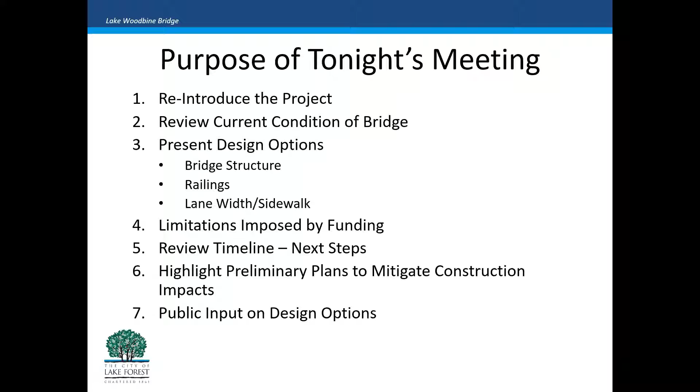Right now we have a budget of about 2.5 to 2.9 million, so that will cause some limitations as well. Review the timeline, and then highlight the preliminary plans to mitigate construction. We obviously know with a ravine and the homes and the traffic that is on Lake Road from the beach, we need to be very careful on how we go ahead and progress through the construction. That's going to be a big part of this, so we're going to take our time putting that plan together. Then obviously public input on the various design options.

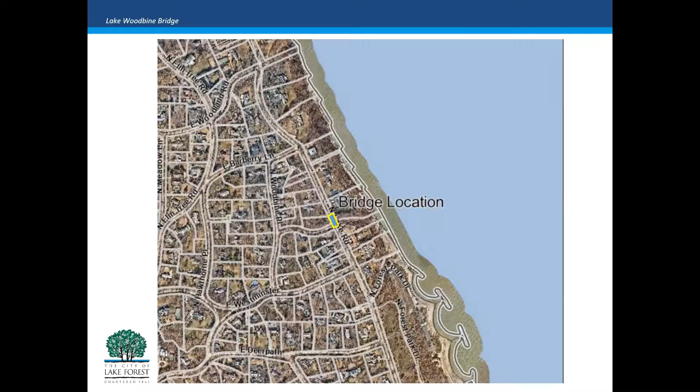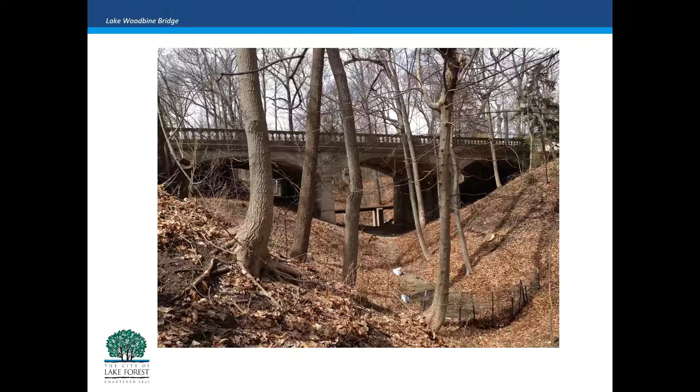Obviously, I think everyone knows exactly where the bridge is at, just north of Woodbine, south of Barberry. Next slide — nice picture of the bridge to give context, as all of the stormwater essentially east of Lake Road runs through our ravine system down to the lake. This is one of those systems as well.

So the preliminary discussion to date — as I referenced, back in 2014, 2015 the HPC, the City's Historic Preservation Commission, had actually done a preliminary review on the bridge, and they directed staff to do a further analysis to go back and discuss further whether repair could occur or whether replacement. After some additional data and a deeper dive and a deeper study on the bridge, it was determined that the bridge had to be replaced. We're going to go into a little more depth on that to explain it further.

The HPC also directed communication and coordination with obvious stakeholders — the different historic preservation groups in town, the residents, the neighbors — and then the State Historic Preservation Office directed that the improvements be compatible with the surrounding historic district, and that the plans would ultimately be reviewed by SHPO, the State Historic Preservation Office, as well. So all of those things are going to occur. This process for us is going to take a little bit longer because we're seeking a grant. When we seek a grant, we actually have to do a phase 1 review, a phase 2 design, and submit them.

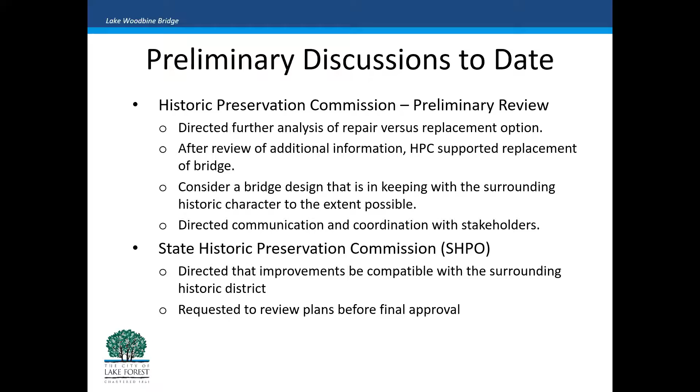It takes a little bit of time to get through this grant process, so the timeline is probably at least 2 years out till we're looking at construction. But Dave, I think you've got a slide on the schedule for that. So Meg, are you going to take us through the historic side? And then Dave will review some of the other items.

Thank you. So I am Meg Kindle and I'm a historic preservation architect, and I think I'm familiar with some of you here in the audience tonight. Just a moment before I begin, sorry. Can I use this mic? We don't want it to interfere with the Zoom, so maybe try talking a little louder to begin with. We can try the microphone, and we have someone here who'll let us know if it's causing issues. Go ahead and just turn it on up top. Oh good, great, hello, is that better? I can hear myself now.

Okay, good. Well, to begin, I'm Meg Kindle, a historic preservation architect, as some of you here today are familiar. And so before we go on and talk with the engineers, just a moment to talk about what we're talking about with this bridge, give some vocabulary to the historic characteristics, and then talk about the challenges.

So first of all, when I think about this bridge, the site and its context in the historic district crossing the ravine, there's this idea that it's a straight flight over the ravine. Certainly the design of the bridge is very traditional with the repetition, with the balusters. It has a very pedestrian-friendly scale to it. It doesn't feel like a highway bridge. It feels like an element of the landscape. It doesn't feel industrial, so that's very important to us and to the design team.

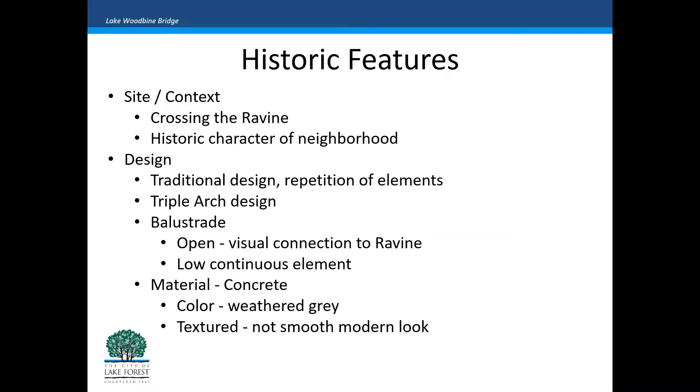Next slide. So going on to design challenges - certainly the SHPO requirements are paramount. We have to work with the State Historic Preservation Agency. We do a lot of work with the agency for transportation projects, so I think that's going to be a good relationship. And I know here in Lake Forest you have a good relationship with SHPO, so I think that's a comfortable ground to be working within.

As far as the design, IDOT has their standards for highway bridges, which this is. This is also a pedestrian bridge, but as a preservation architect - be it a house, a train station, a CTA station, a school - there's a reason codes exist, and that's to keep everybody safe. So we need to make sure that we accommodate and listen to the IDOT requirements for crash barriers, and that's just undeniable. We have to make sure, and this is why Lochner is involved, that we are keeping the traffic where it belongs and not in the ravine. The other idea is that we need to have the width adjusted for modern cars.

And also the sidewalk has to be wide enough to meet modern code for the ADA. So there are codes that exist now that didn't exist when this bridge was designed, and we can't change that. We have to work with it. So those are part of the design constraints of this bridge, as well as historic.

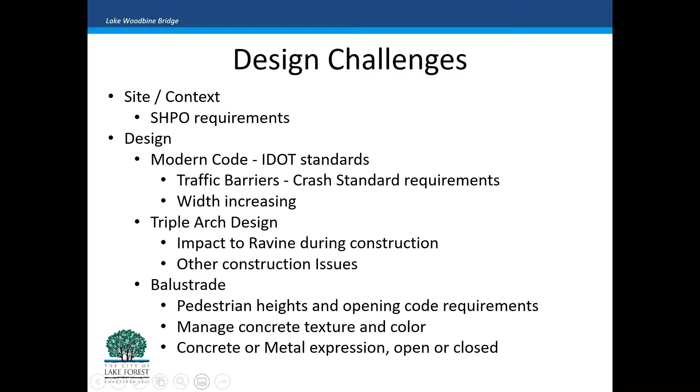I know it's a busy time of year, and the number of evenings we have left is running short. So I'm going to talk a little bit about the existing bridge itself, put things in context. It was constructed in 1912 as a 3-span closed spandrel arch. What that means is the bridge has 3 basic arches, and the sides hold in material that the road is based on. So basically it's a filled bridge. The material inside is sand or gravel or something porous.

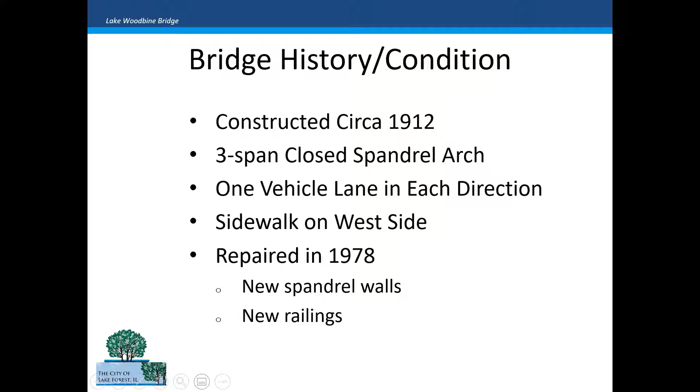There's 1 vehicle lane in each direction, same as on Lake Road. There's a sidewalk on the west side. It was repaired in 1978, at which time they took off both sides, probably replaced the roadway as well, and put new railings on. So almost everything you see, unless you get underneath the bridge, is from 1978. It's not original, and I'll show you some pictures of it.

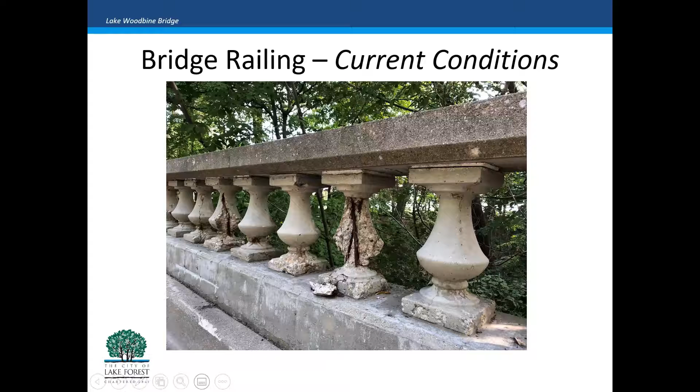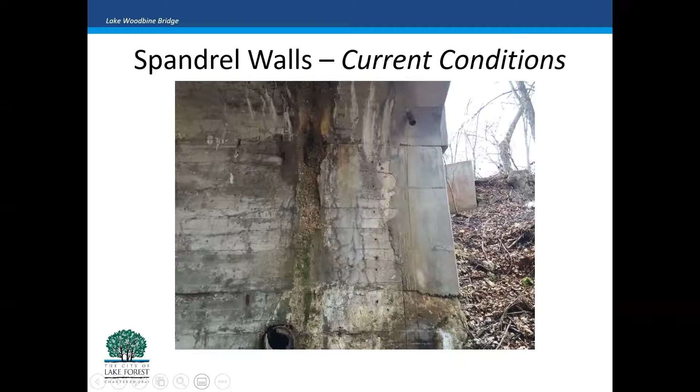But when you get underneath, you start to see some things that raise the eyebrows a little bit higher. This is one of the piers, and you can see on the right-hand side that gray concrete is what was put in 1978, and everything to the left is original. It's showing a lot of map cracking, and if you can see some white lines, that's efflorescence, where water is actually seeping through and pulling the lime out of the concrete. That's a sign of advanced deterioration, and it's not repairable kind of deterioration.

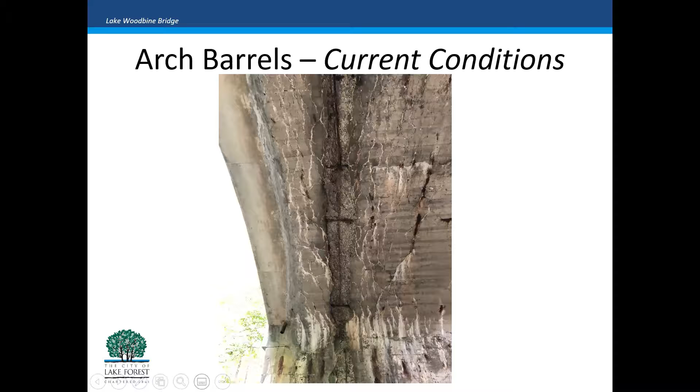All right, next slide. This is looking up at the underside of the bridge, and you can see that exposed rebar that shouldn't be there. That's where concrete has actually fallen off. That line is probably the curb line up above, where water is leaking through at the curb line and coming straight down through the fill material in the bridge. It's gotten through to that steel, which has expanded a little bit and popped off that concrete. And this isn't the only place where that's happening.

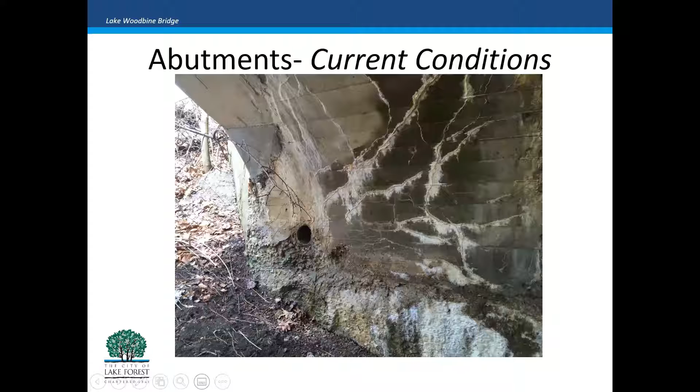And then this is showing one of the abutments, where you can see that water has gotten in behind the abutment and is starting to degrade that concrete as well. So it's for these reasons that we've recommended a replacement of this structure.

As Mike mentioned, we've got 3 decision points that we're really considering.

The width of the bridge is a concern, since it fits nicely in the adjacent community right now, and there isn't much appetite for widening this bridge. We'll do our best to keep it as narrow as we can. The current IDOT guidance is that it needs to match the existing roadway on each side, which is slightly wider, maybe a foot or so. So the roadway itself will need to be slightly adjusted, but that's just to match the approach on each side.

The sidewalk that's out there now is probably 3.5 feet, and if you count the top of the curb you can get another 6 inches, so it might be 4 feet wide. Current ADA criteria is 5 feet, so the sidewalk would have to be widened about a foot. So right now we're talking about widening the bridge by 2 feet if we have to, but again, that's according to IDOT criteria that we have to live by.

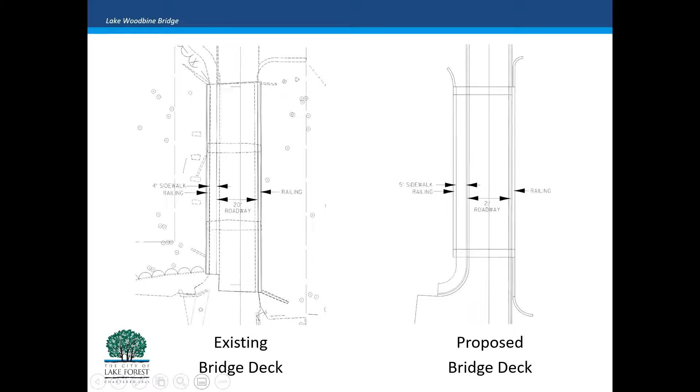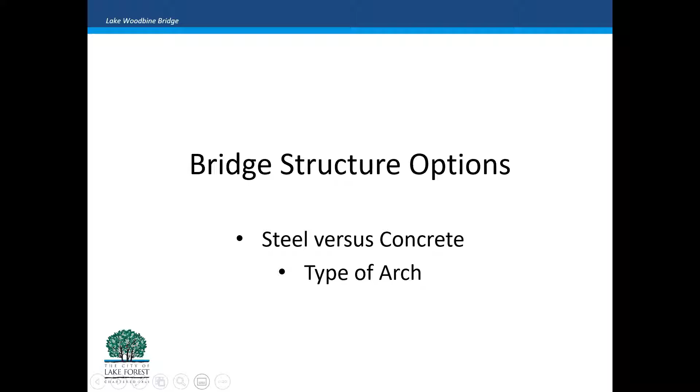Bridge structure options. As Meg mentioned, there are a lot of architectural concerns that go hand in hand with the engineering considerations. So we're looking at steel versus concrete and that type of modern arch.

If you could go to the next slide. The first option that we looked at was actually something very similar to what's there now. This bridge option has quite a few design flaws and strikes against it. It would basically just put back the inherent flaws that occur with a bridge of this type.

There's not much we can do about a filled arch bridge. Moisture is going to get in there and it's not going to have anywhere to go.

The other issue with this bridge is that we cannot put the new bridge back where the old bridge is currently located, because we can't pull the old foundation out, and we can't reuse it because we're not sure what's there. It's 110 years old, and it is not engineeringly feasible to reuse a foundation that old.

So if we did reuse this bridge type, we would have to shift it one direction or the other, or we'd have to start changing the arch lengths so they could sit on the new foundations. That would also require quite a bit of construction down within the ravine itself to get new foundations in.

We're not only concerned from the project perspective with what the bridge is going to look like, we're also concerned with how we're going to build it, and with the health of the ravine.

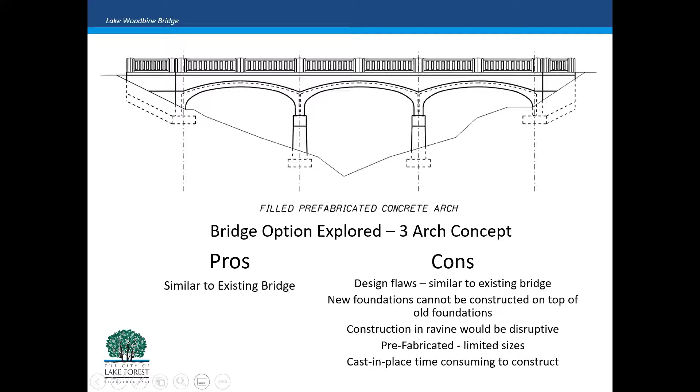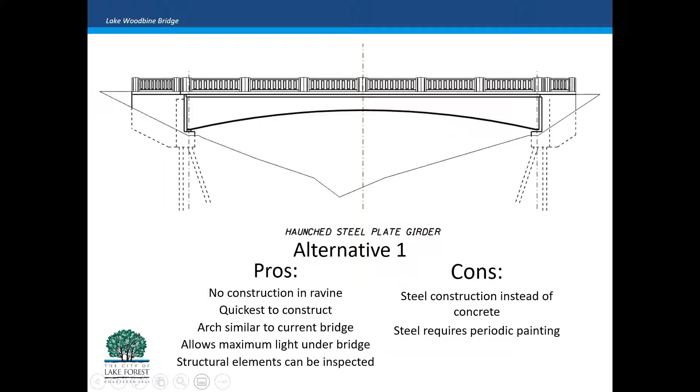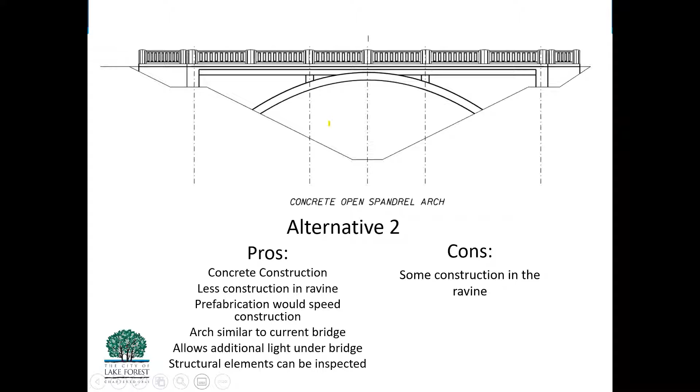So those are the three bridge types that we are considering.

Moving on to the railings. We have very specific requirements because this is a bridge on a public roadway longer than 20 feet, so it comes under IDOT's jurisdiction. The railing itself has to be 3.5 feet tall, with limitations on how wide any openings can be for safety, so kids can't fall off or squeeze through a hole. It must meet crash test standards, with different levels of crashworthiness, which I'll discuss in the following slides. Since the span length puts it under IDOT jurisdiction, they'll have the final say on whether our proposed railing meets their requirements.

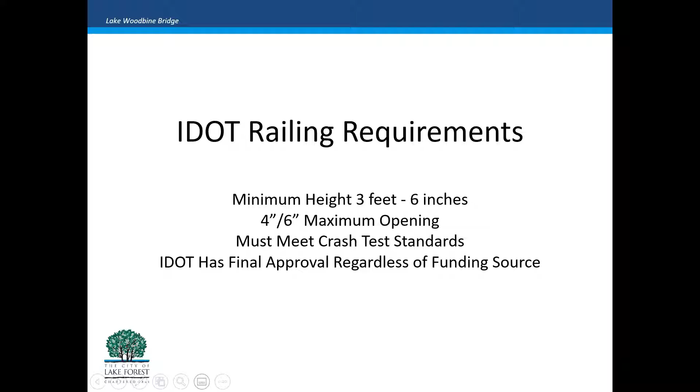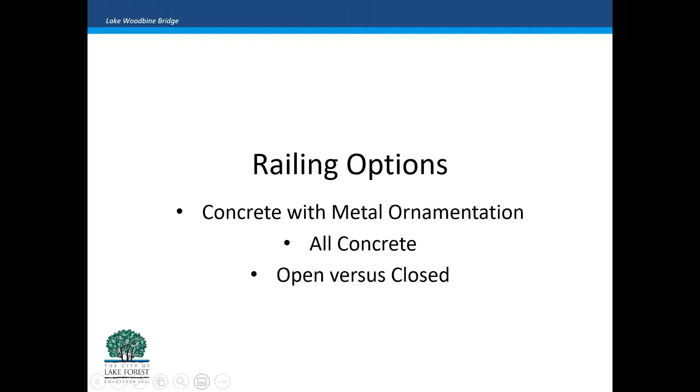As Meg mentioned, there are a lot of architectural things we're trying to keep in mind when looking at different options. The first two are really variations of the same idea: a hybrid railing where the bottom 2 feet 10 inches is crashworthy. There are a few options for that—it can either be solid concrete with some patterning, or it could have open windows in it. But the crashworthiness is on the bottom.

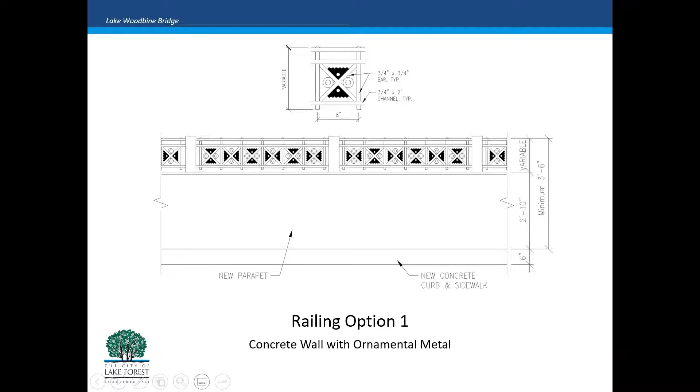The total height needs to be at least 3.5 feet, and we can go taller if we want. That's where, in this slide, we've shown some ornamental railing. But really it's up to the architects and their creativity to explore options for what we want in that area. The next one is similar, just a different railing type.

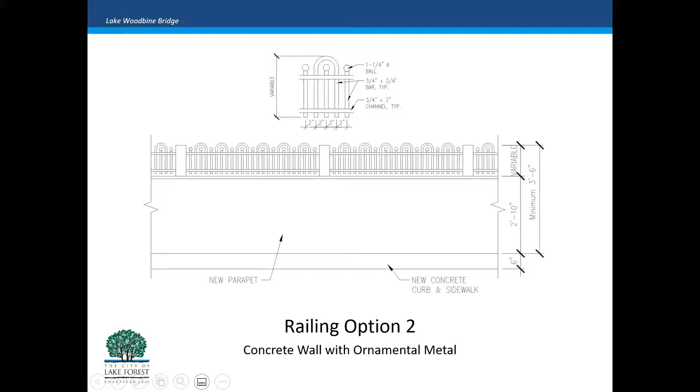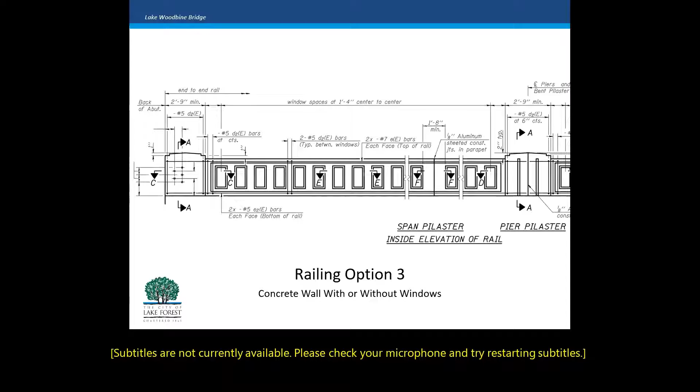The third option is an IDOT standard railing. There are a couple of versions depending on the height you want—you can do the shorter version with ornamental railing on top, or a taller version with this pattern. You can have open or closed windows. It's all concrete, with large monolithic concrete endpoints that are also a place where you can put a relief or some patterning, so there are options for what you can do with this. IDOT just requires that the basic railing itself—the reinforcement and dimensioning—not be changed, because that's what has been crash tested.

This railing has also been developed in coordination with the State Historic Preservation Officer, and they worked together to develop the details and the look and feel of it. If you're in an area similar to this, where SHPO has indicated you should consider a historic character type railing, and you propose to use this one, it will meet with their approval. That is a railing that, as engineers, we like very much.